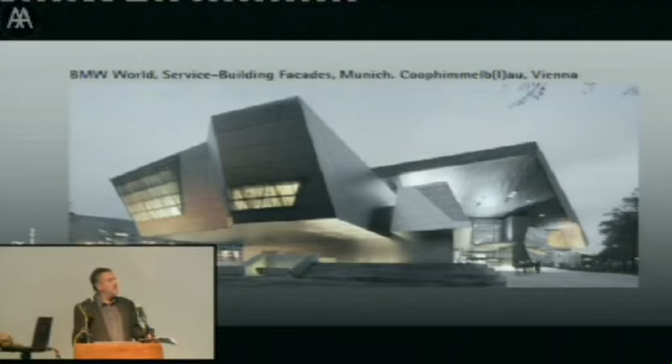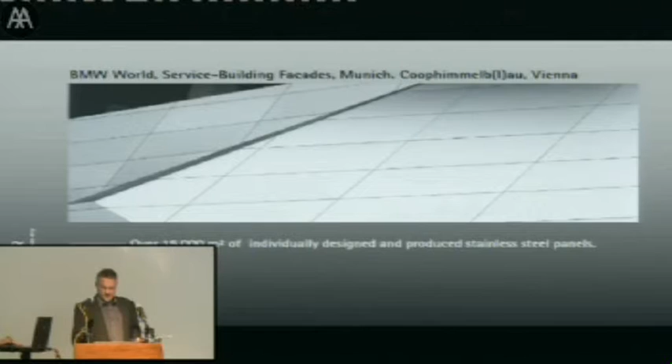Many of you may know this one—perhaps not such a well-known image—but we did the facades for the service buildings for the new BMW World in Munich, Coop Himmelb(l)au. What we basically got from the architect was a Rhino model, and we developed all 15,000 square meters of individually designed stainless steel panels ourselves, the execution design with high quality detailing. In that sense, this is a special solution that's been mass customized because there are so many of these panels on this project.

And this is another one we did. It's a temporary opera pavilion that traveled around, I think just Germany, but possibly to Austria as well. Again, Coop Himmelb(l)au, inspired by Purple Haze by Jimi Hendrix, according to the architects. Acoustic modelling produced—that's what Purple Haze by Jimi Hendrix looks like, basically. And that gets taken down, put up in various places. I've actually seen that one myself last year, travelling past it.

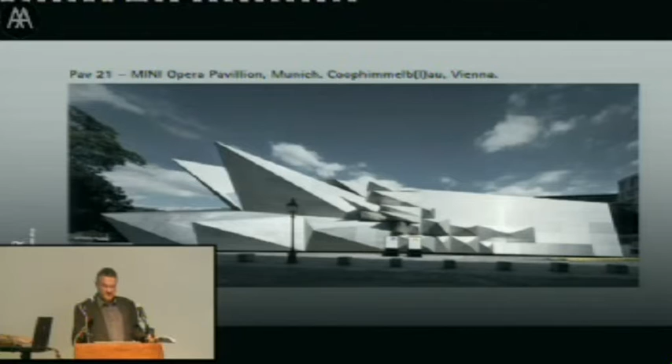That's something that, for example, our Mr. Reifer develops the solution and then other people start executing it, but he follows the progress of the development and how it will be practically applied through to completion on every project. Obviously, he concentrates more on the bigger projects, the ones with bigger technical challenges, but even after 35 years, he still oversees the work of our draftsmen in developing these solutions.

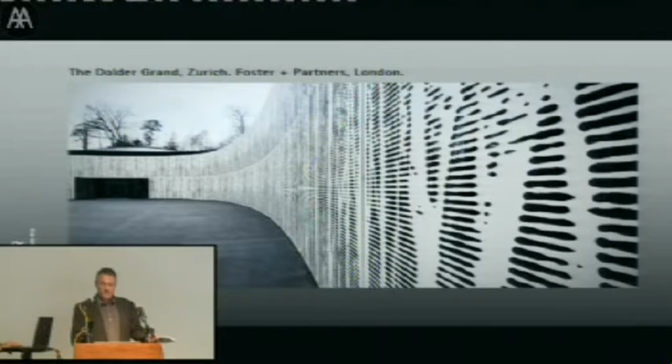I'm just running through a few of our projects here, just so you can see what we've been doing recently.

And I should point out at this point that I'm the man at Frener & Reifer, been there for 8 years, who does English translations and marketing and so on, so I'm not really a technician, as you can probably tell already. But this is recently completed, last year, it's up and running, and you can see the stacking system, lots of technical challenges there, again developed as a concept, and then worked on with the architects and put into place.

And this is BMW World, again, but a smaller construction, the bridge with the 3 dimensionally curved stainless steel cladding, developed in the way that a car manufacturer would, but applied to bridge construction.

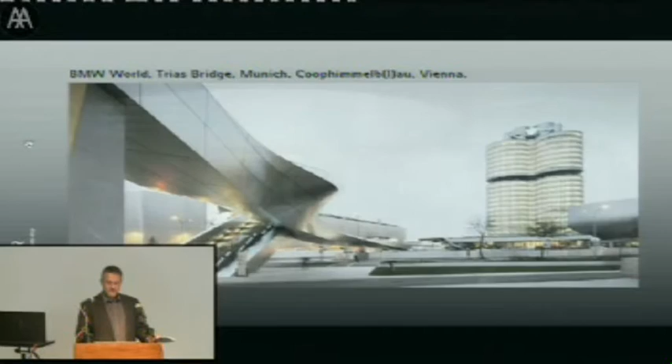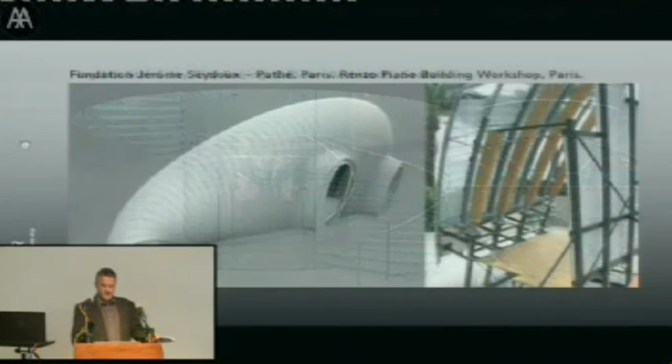And this one is the one that some of you were talking to Michael about over lunch. This is in construction at the moment, or just starting, the Pathé Cinema Museum in Paris.

And this is the original design, modelling by Renzo Piano, and some of our mock-ups there on the right, which again is a specialist solution, and there's all kinds of material - glass, steel, aluminium, wood - so making that work for this project, which is going to look pretty impressive when it's finished, I think.

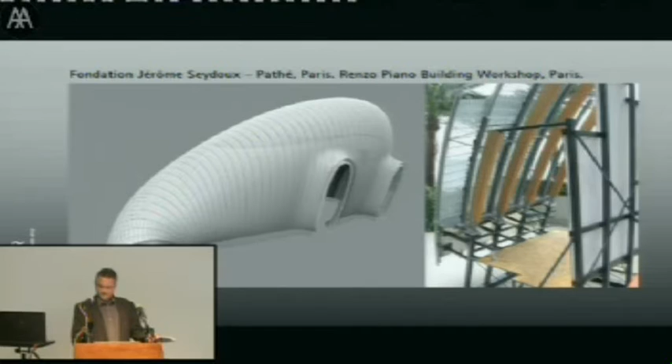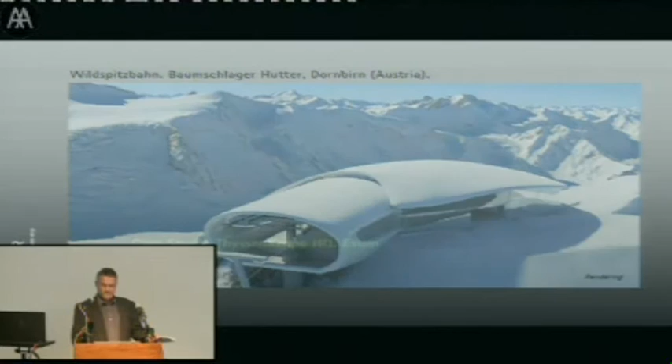Now, a few more details about one project in particular, the ThyssenKrupp headquarters in Essen, Germany. Just to go through the process of what happened on this project, this is the original design by these two architects, Chaix et Morel in Paris, and JSWD from Cologne.

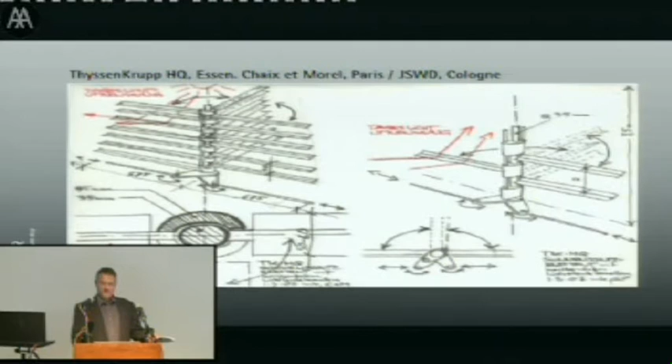Here are the sketches by the French architects about how they wanted the sun shading system to work. We received these and got to work, and Mr. Reifer got his pencil out and started analyzing what he would do.

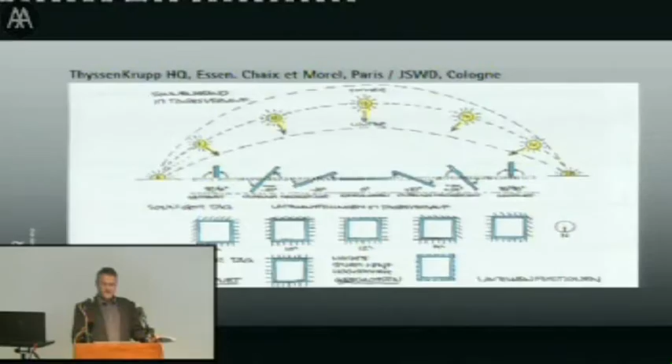Based on that was what it was meant to look like when it's completely open at the top, completely closed at the bottom, with the various stages in between, following the course of the sun throughout the day. And this is what a workspace is meant to look like.

You can see the sun shading system in operation as envisaged at the beginning of the process. That was what was required.

And this is what it actually looks like now it's built. Those are the interior spaces with the sun shading system. You can see it actually does what they wanted it to do.

And there's a close-up view from the outside: 9,000 square meters, custom-designed, produced stainless steel sun shading louvers.

Those are the lamellas, and that's the finished building. That's what it looks like. And I think it's already won an award recently at LEAF for the sustainable technology in a modern building.

Here, just to talk very briefly about how we work together in terms of industry collaborating with academia. As was mentioned, we have a technical school nearby, and a lot of our technical draftsmen come from this school. Some have been with us now for 30 years.

We've got lots of experience talking about the craftsmanship. A lot of the people in production have been there for 20, 25 years. Every time you go to the Christmas party, there's another person who gets a grandfather clock. I've been there for 30 years.

So that's something - it's very much a family-run company, and it carries on with that tradition even though we've expanded recently. And we like to have lots of local expertise from South Tyrol, from this school, from places around.

It's not a very big province - it has 450,000 people, so a lot of our technicians are from South Tyrol.

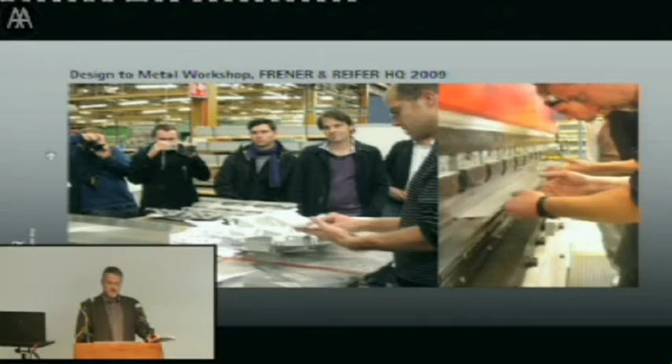Here we can see this is the design-to-metal workshop that we held in our HQ two years ago. And that's Tobias Walliser, who's from the Academy of Fine Arts in Stuttgart, and some of his students.

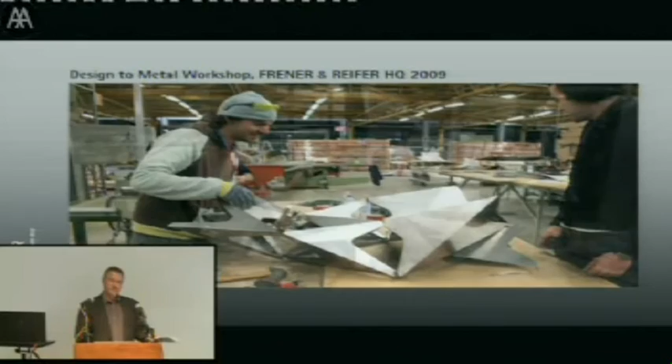We also had students from Professor Werner Sobek from ILEK, the Institute for Lightweight Structures, all getting a feeling of working with metal, having the metal under their hands themselves.

And these are just some pictures of the students working on various prototypes, designs, inspirations, concepts in our workshop for a couple of days.

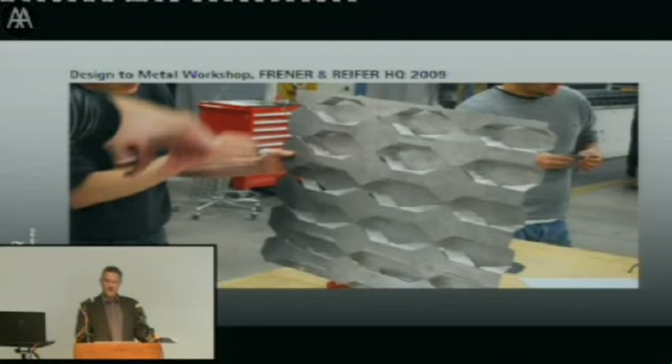We do a lot of things. And there's Michael, who's meant to be here on the left, enjoying the model.

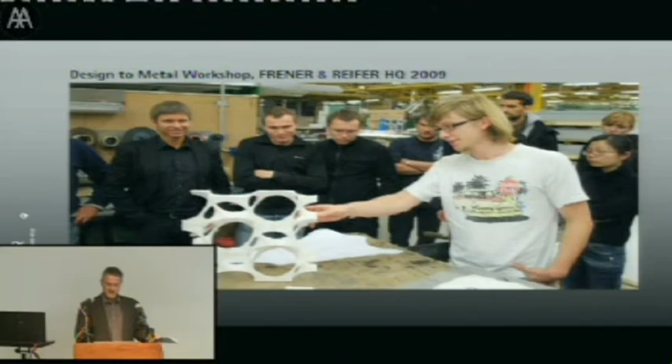So we have very close collaboration, and this is one that we developed for Glass Tech in 2010, in collaboration again with technical departments of German universities, especially from Stuttgart.

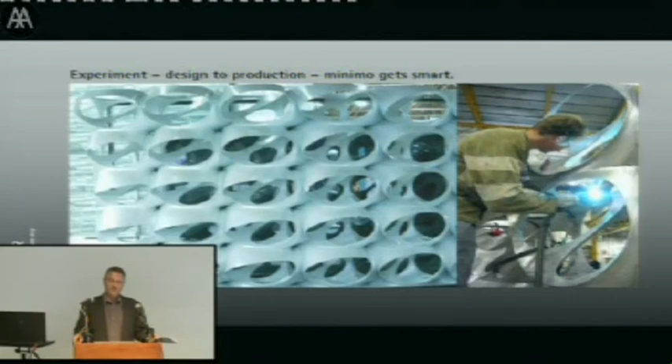We like people to come and visit our workshop and show them what we can do. Thank you very much.

Thanks, Richard. Thank you very much. Okay.